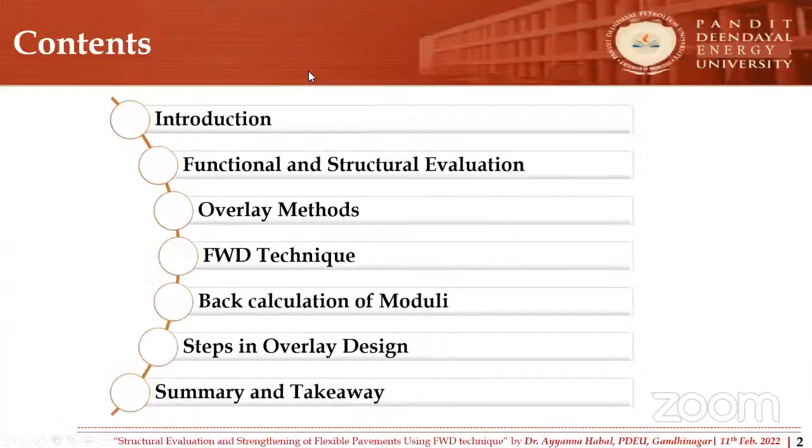I hope this is because the topic is very interesting: structural evaluation and strengthening of flexible pavements using FWD technique. This is one of the newest techniques already suggested by MORTH. Earlier we used to adopt BBD, Benkelman beam deflection, for structural evaluation, but now MORTH has mandated we have to go for FWD only. There are many drawbacks with the existing method, that is the reason MORTH has mandated FWD, and I will be covering those aspects.

Earlier speakers have discussed pavement evaluation in general, both functional and structural evaluation. I hope Dr. Ankit Gupta has already covered it, but I will be covering more in depth regarding structural evaluation, specifically using FWD technique. One is structural evaluation, and the next aspect is strengthening of the flexible pavement, that is in terms of overlay design.

Contents of today's presentation: introduction, followed by functional and structural evaluation. I will briefly touch upon functional evaluation and various methods adopted for structural evaluation, then concentrate a little on BBD and more on FWD, then overlay methods, then FWD technique in detail - what are the various parameters or equipment specifications, how to conduct this survey, and after conducting, how to analyze this data. That is very, very important.

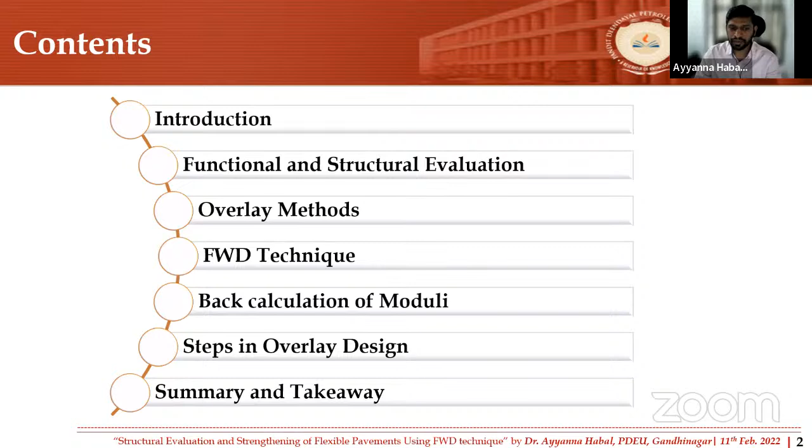Then back calculation of modulus. One important aspect in FWD technique is we have to back calculate the modulus of existing pavement layers using FWD data. For that, there is a small software available, KGPBack, and I will show screenshots and, if time permits, demonstrate it as well. At the end, I will summarize quickly the steps involved in overlay design using FWD data, then summary and takeaway from today's presentation.

Let's start. Before that, I would like to give some statistics related to roads because it is more relevant to this presentation on pavement evaluation. How many of you are aware how safe our roads are? There are so many accidents happening every day that we may not be aware of. During COVID, we might have kept a tab on checking the number of active cases, recoveries, and deaths, but no one has checked these road accidents.

If you see, these numbers are not less, they are very high. For example, for 2019, as per MORTH report, road accident deaths were over 1,51,000, and deaths occurred only due to road accidents in the year 2019 alone.

You can imagine how many deaths are happening on roads all over India. On average, there are 415 deaths per day due to road accidents. These numbers are only fatal accidents. If you include injuries, it is almost triple the number. And remember, these are only based on reported numbers. We all know that not all accidents get reported. If small accidents happen, they are usually sorted out in the field itself without reporting.

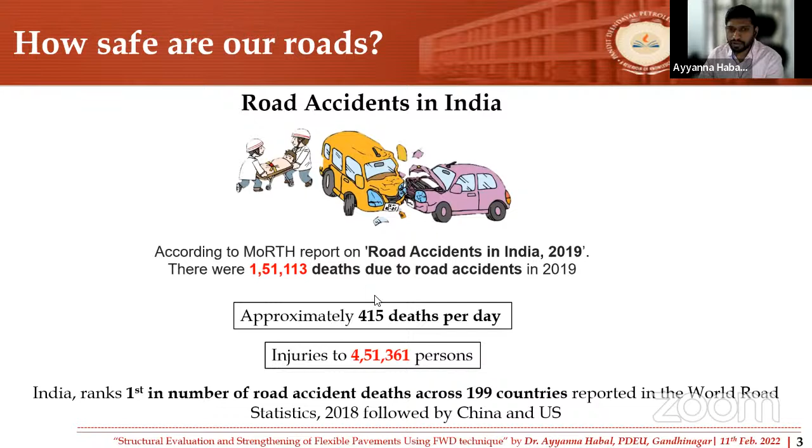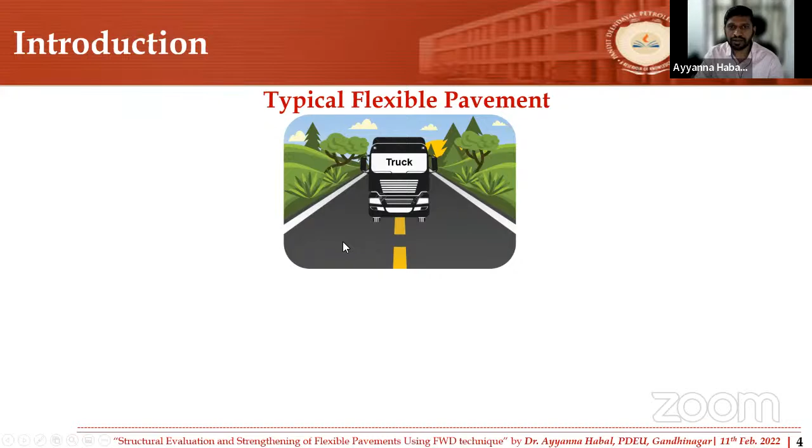Before going into the presentation, I would like to show briefly how a typical flexible pavement looks like. When we are driving on a road, it looks very nice, right? Black top with nice markings, central lane marking, side marking and all. But many of us are not aware what is underneath. There are many layers, and each individual layer has its own function. Each layer is designed and constructed scientifically. All these layers bear loads and transfer loads to the underneath layer, finally safely transferring the load.

It will create damage into the pavement, or it will start showing in terms of rutting or fatigue cracking or so many other types of cracking.

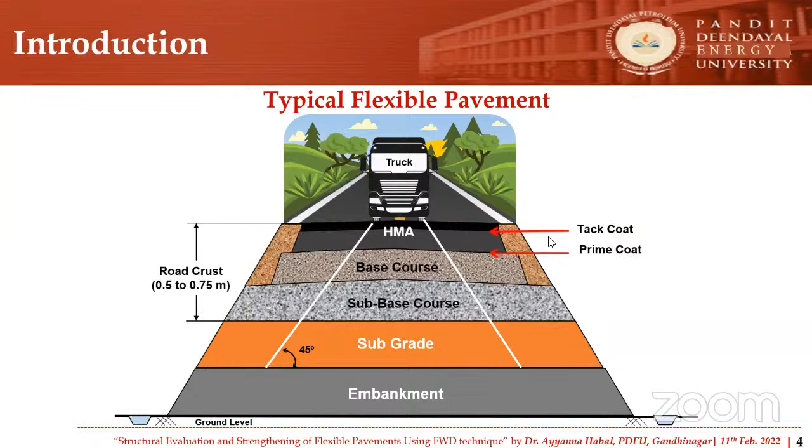So these kinds of pavements in service have to be evaluated periodically to see their functioning, either from a functional point of view or from a structural point of view. During service life, due to the repeated application of vehicular loads, because dynamic loads are plying on the roads, they will damage the road. We have to reduce that; we cannot control everything, but this deterioration should be in such a manner that it should not fail until its terminal life or design life is reached. So periodically it has to be assessed, both functional as well as structural conditions.

Functional aspects can be assessed through roughness, that is the unevenness of the road, and skid resistance can be assessed through its surface by checking whether the pavement has become smooth or not, and also drainage properties—water should not be stagnant on the road. All these aspects affect functional performance. Either it will lead to skidding of vehicles causing accidents, or if water is stagnant on the road, it will disturb visibility and lead to accidents. Because of hydroplaning also, skid resistance will drop. Because of an uneven road, riding quality will be poor, passengers will be uncomfortable, and it will increase the road user cost.

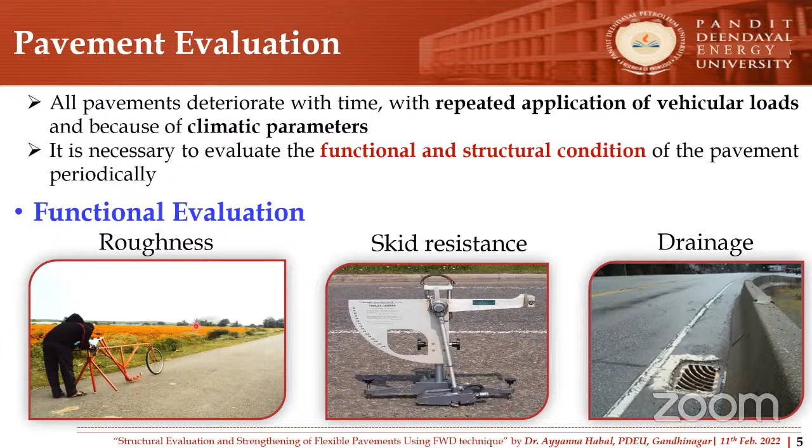Anyway, I'm not going in depth for functional evaluation. Today's presentation is restricted to structural evaluation. A structurally sound pavement should be able to withstand repeated application of wheel loads. Roads are meant for repeated application of wheel loads, right?

So even after applying many vehicular repetitions, roads should withstand the wheel loads coming over them, until their terminal life, that is, till the design life. But there are many ways it may not function properly.

It may not withstand the loads, either due to lack of support from the subgrade, or material property problems at individual layers like the asphalt layer, granular layer, or subgrade layer. There can also be variation in traffic loading. During construction there might be different loading, and in service life there might be increase in traffic loading, or adverse environmental conditions that lead to structural inadequacy of the pavement.

The thing is, one has to evaluate whether the pavement is structurally sound or not. That can be assessed in various ways.

One such method is BBD, Benkelman Beam Deflection studies. I hope many of you have heard of this, because for the last 2 to 3 decades it's been used extensively. Now slowly we have shifted to FWD, falling weight deflectometer, which I will cover in detail. This is the BBD, and this one is FWD, and DCPT, dynamic cone penetrometer—this particular test setup.

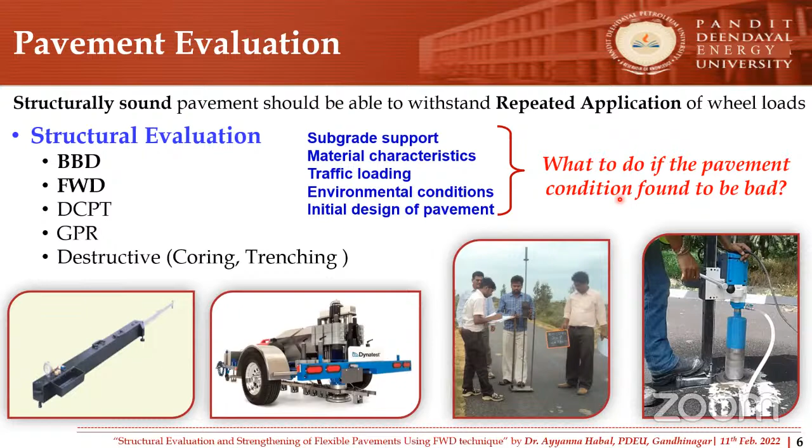Basically, if it is not sound, we have to either increase its strength through some means, or leave it until it fails completely. It may drop, we have to see the remaining life, as it may not reach the design life.

Let's see how to do strengthening. The most common practice is by providing an overlay, meaning adding an extra layer over the existing pavement. That is called overlay. Basically this will add extra life if it is a structural overlay. Otherwise, there are various reasons why we provide an overlay.

For example, to increase the load carrying capacity of the existing pavement. During design, the load carrying capacity was based on the traffic survey at that time. Later, during service life, due to diverted traffic or other factors, if the load plying on the road increases, we may have to add one more overlay to cater to that increased loading.

And then, to correct the defective surface condition and rectify surface defects and distresses, one may give an extra overlay. Also, for pavement maintenance, periodically there will be resurfacing, or overlay given, so that it can successfully reach its design life.

From the functional point of view, and sometimes aesthetic point of view also, an overlay can be provided. For example, if the pavement might be structurally adequate but has become smooth because of traffic, one may have to provide another overlay or layer just to increase the skid resistance.

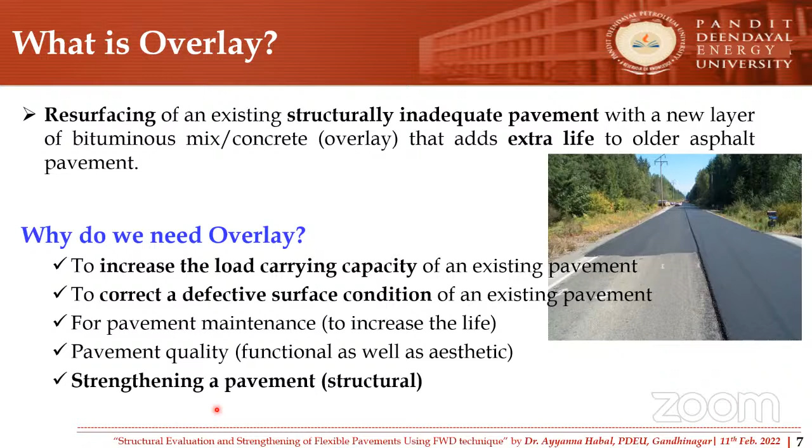And finally, for strengthening of the pavement—if it is not structurally sound, if the pavement has dropped its structural adequacy—one may have to provide an extra structural layer over the surface of the existing pavement. That way, one can strengthen the existing pavement condition.

Let's discuss the various methods available: we can provide a bituminous overlay over bituminous pavements, or even bituminous overlay on concrete pavements, and concrete overlays over bituminous pavements. Nowadays you may have heard of thin and ultra-thin white topping—these are concrete overlays over bituminous pavements and concrete pavements. That is also possible.

I'm not going to discuss all of these, as it takes a really good amount of time. I'll be discussing bituminous overlay over bituminous pavements. Now the question is how to design this overlay. As I mentioned, if our pavement is structurally inadequate, then we can go for an overlay.

We cannot simply say a pavement is structurally adequate; we have to quantify it. We need some parameters so that accordingly we can provide a suitable thickness of overlay.

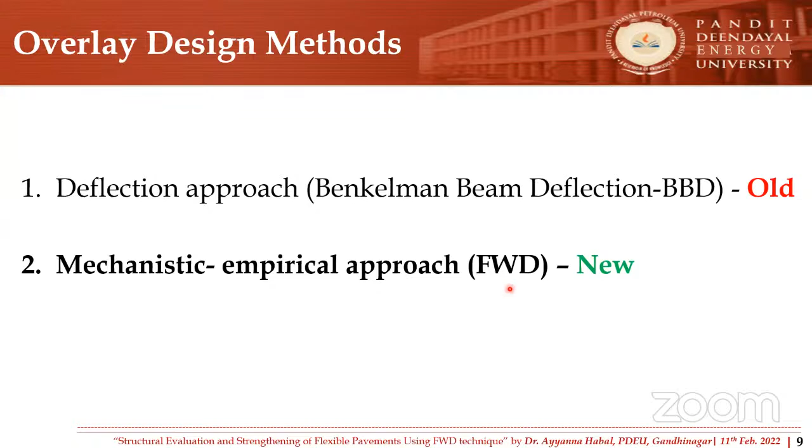There are different methods. One is the deflection approach, which is the old method—back then we used the Benkelman Beam Deflection method. The new method is the mechanistic empirical approach, in which we adopt the FWD technique. That I will be covering in this presentation.

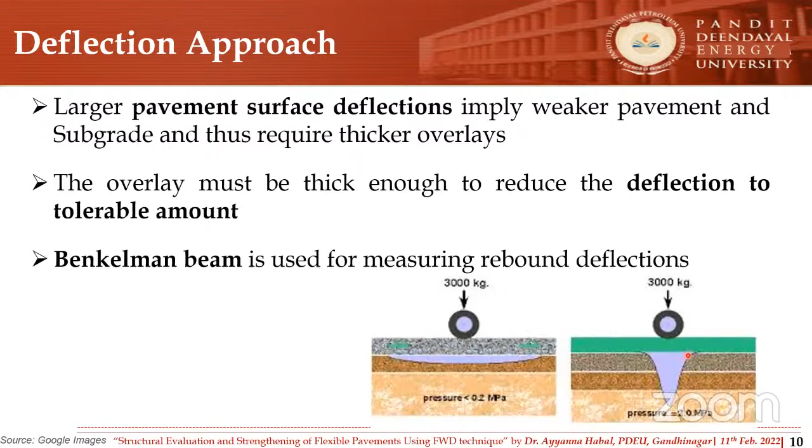So that way we get to know the structural adequacy of the pavement. If the deflection is more, that indicates the pavement is weaker, and we need to provide an overlay to bring down these deflections under the limits. This is how one can provide the overlay using this method.

In the mechanistic empirical approach, we have to calculate the remaining life of the existing pavement. Remember, initially we designed and constructed the pavement considering some years of life, maybe 15 or 20 years for a flexible pavement. Maybe after 5 years, we have to check the structural adequacy—whether the same pavement will continue to cater for the remaining life, whether it will serve or not.

That can be done by checking the fatigue cracking criteria and rutting criteria, given in IRC 37. Based on the remaining life, we can assess whether a thickness of overlay is needed or not, and if needed, how much is needed.

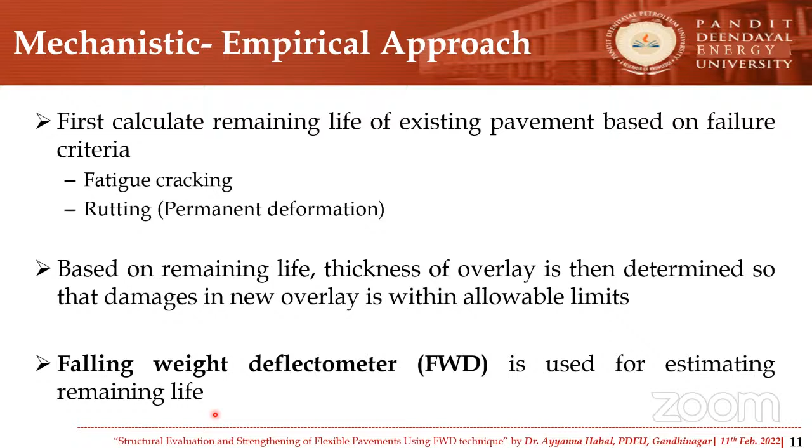Falling Weight Deflectometer can be used for estimating the remaining life—I will show you how it can be done. Well-established IRC guidelines are available for both methods: BBD as well as FWD. This is the new method, and IRC 115 is applicable for this.

Let's see why we are shifting to FWD—what is the problem with BBD? BBD was developed under the R6 research project of MORTH, two to three decades back.

It was developed and is used extensively in India. Even many developing countries still use it; in fact, even in India, we use it for less important roads. The first code, the IRC code related to BBD, was released in 1981. BBD is used for measuring the surface deflection of pavements under static or creep load.

This is a typical photograph of a BBD survey where a standard axle loading truck is used. Under this load we have to measure the deflection. The pavement will be under deflected condition, and as it slowly moves further, we measure the recovered or rebound deflection. This is either static or moving at walking speed—that is why it is called measurement of deflection under static or creep load.

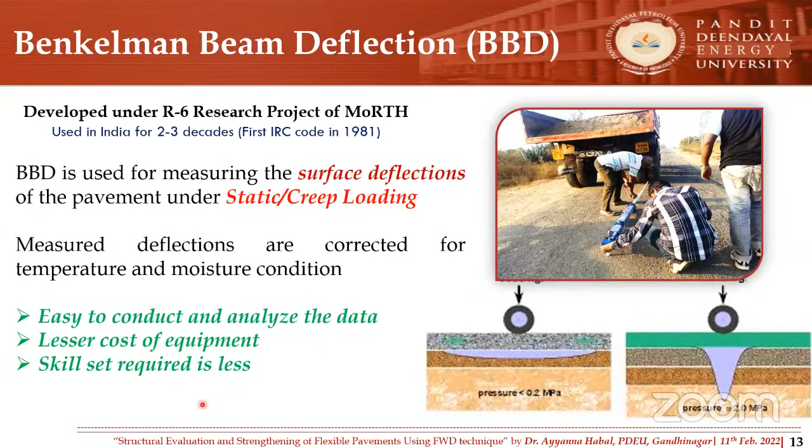But this method is quite popular and has been used for two to three decades. Even now, many developing countries use it, mainly because it is easy to conduct and analyze the data—relatively easier for conducting the survey and analysis, and at lesser cost of equipment. This equipment is very simple and its cost is low compared to FWD, and the skill set required is also less. With a laboratory assistant or a little training, we can use any manpower for conducting this BBD survey. These are the advantages, and because of that, it is extensively used.

But let's see the drawbacks of the BBD method: static load is used for measuring the deflection, and it is more labor intensive.

One of the drawbacks is that this method was developed considering thin pavement layers. Remember, this was developed 2 to 3 decades back, when we had different mixes like bituminous macadam and premix carpet, which are rarely used nowadays. The current pavement thicknesses are much thicker bituminous pavements.

So we use dense bituminous macadam and bituminous concrete. Most importantly, pavement in the field encounters dynamic and repetitive loading - moving loads - whereas we measure under static conditions, so the field simulation is not proper; it doesn't represent the actual loading condition. Another concern is repeatability of results, because of manual involvement there are high chances of error.

Properties of constituent layers cannot be predicted - remember, this is the biggest drawback. Because of that, we cannot predict the remaining life. Whatever deflection we get is a combined effect of all the layers, measured at one surface point. From that it becomes very difficult, or we cannot calculate the constituent layer properties like modulus of each layer. It is not possible.

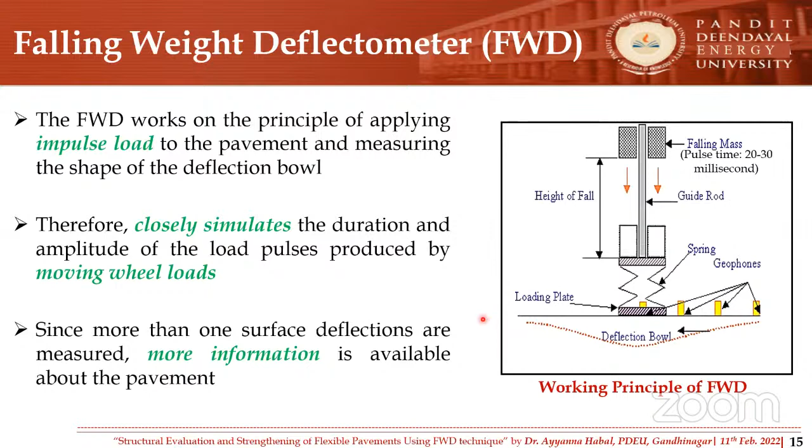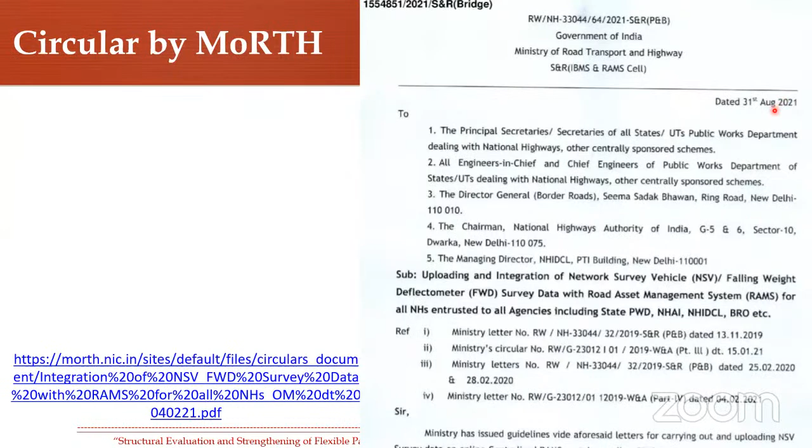There was a circular released by the Ministry of Road Transport and Highways stating that all roads have to be evaluated using NSV and falling weight deflectometer for the road asset management system. This applies to all PWDs, NHAI, NHIDCL, BRO, etc. This is a recent notification from last year. So now we are no longer using BBD - it's good to understand and learn about FWD since in future we are going to use this one only for evaluation.

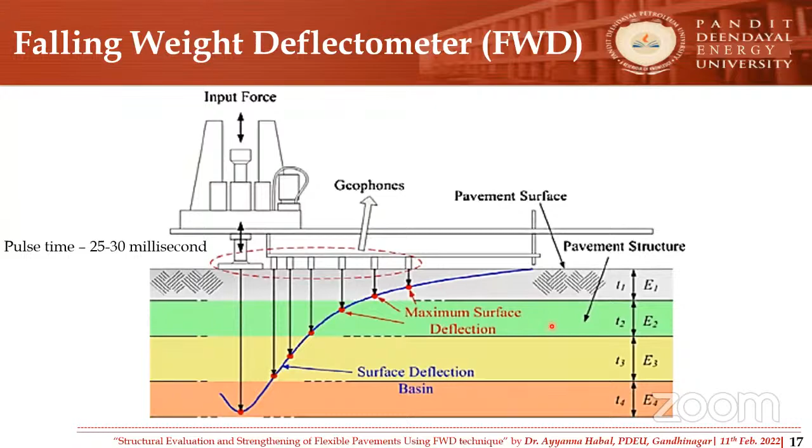I would like to cover more aspects of FWD. This is a schematic presentation - this is the trailer type FWD. This is the point of interest where we measure pavement condition. The input force: the load is lifted and dropped to produce an impulse load. A series of geophones are connected to measure deflection when the load is applied on the pavement surface. Even under the plate itself, measurement can be done - that is the maximum deflection. At different spacing, these geophones are set to measure deflection corresponding to different layers, which helps measure the modulus of different layers.

Different parameters in the falling weight deflectometer: it must produce a standard impulse load of 40 kilonewtons when it hits the road, and the loading period is 25 to 30 milliseconds. It measures the surface deflection profile, meaning the deflection bowl has to be captured.

Then we back calculate the material modulus by comparing the measured deflection bowl and estimated deflection bowl. We have to estimate a deflection bowl in such a manner that the modulus of each layer is adjusted - it's a kind of trial and error process, not simple, and tedious if done manually - almost close to impossible. That's why there are so many algorithms and software available. One such software is given by IRC along with the guidelines, to back calculate the modulus, which I will cover in subsequent slides.

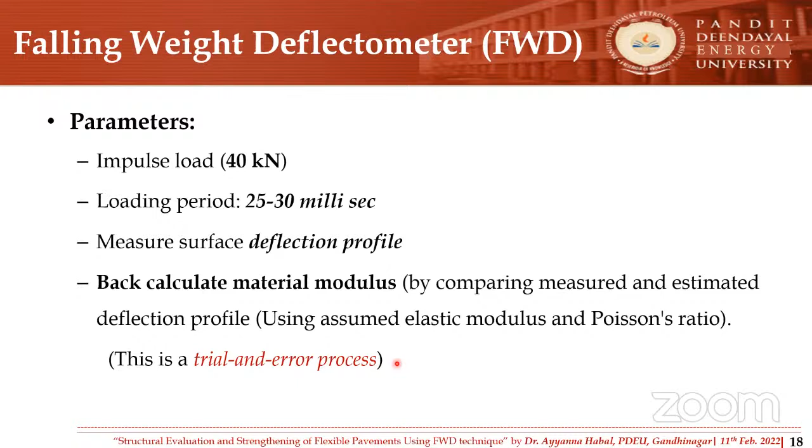I would like to show a short video of less than 2 minutes to see how this equipment looks like. This is a trailer type FWD. It is an animated video. Later on, I will show actual photos of FWD.

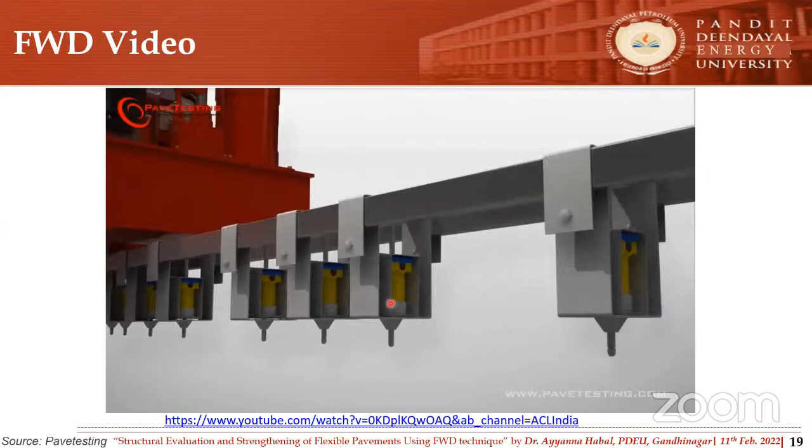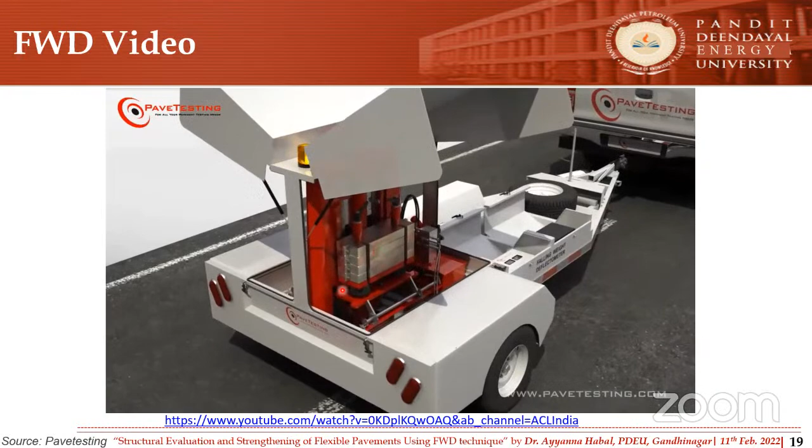This yellow color you can see, these are the geophones which will acquire the deflection data when load is dropped on the pavement surface. Because of this trailer type or vehicle mounted deflection FWD, labors can be reduced. You can see here loading arrangement. This load can be lifted and dropped to produce an impulse load.

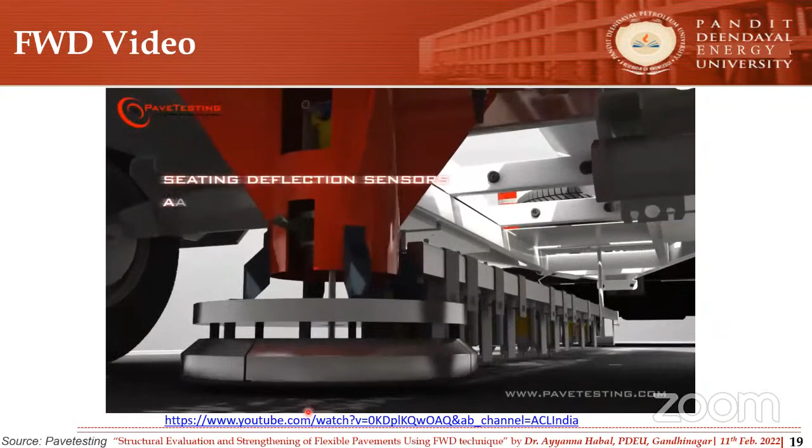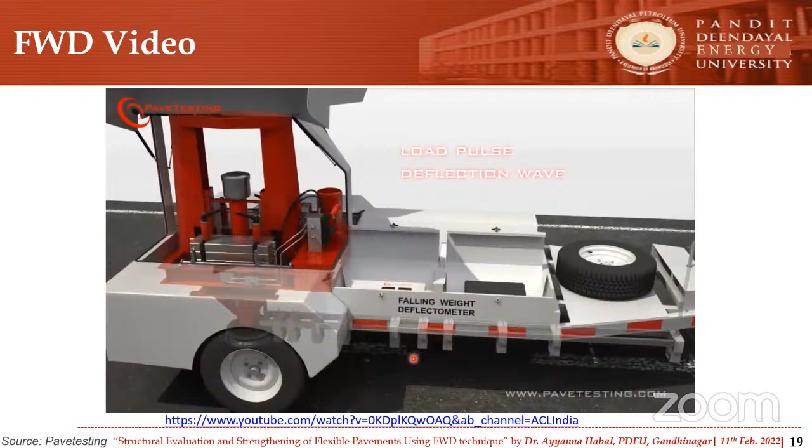You can see while measuring, this plate has to be in contact with the pavement surface. When load is dropped, at that instant of time, all the geophones record the deflection data, and also peak load will be recorded. These geophones are set in a series at different intervals. Around 4 to 9 geophones can be used depending upon our requirements based on the pavement thickness.

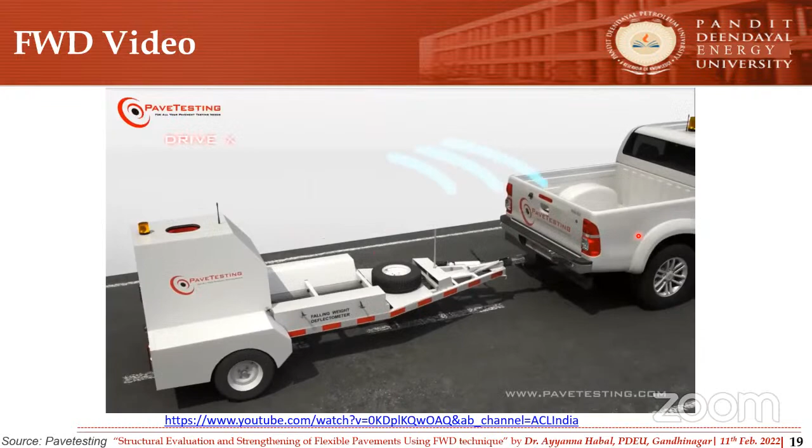It is a quick method. Just at each location, it has to drop 4 times and all the data has to be acquired, and it can be further moved to the next location. It is vehicle towed or vehicle mounted, so easily the majority of the work can be covered within less time. Then next comes the parameters.

As I said, 4 to 9 sensors can be used, or even 6 to 9 depending upon the requirements and type of the FWD. Sensors or geophones are placed exactly under the load drop weight, that is 0 distance, then at 200 millimeter distance from the loading point, 300, 600, likewise up to 1500 or sometimes even 1800 millimeters can also be used.

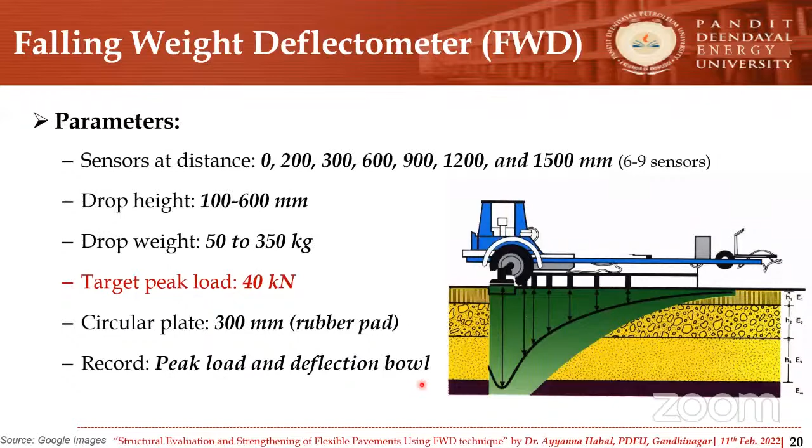A circular plate of 300 millimeter diameter is used with rubber padding so that firm contact will be there with the road surface in the loading plate. And there has to be an arrangement which can record the peak load and deflection bowl at the same time. This is very useful. With this data only, one can further calculate the modulus of each layer.

Now we know about the instrument. Let's understand, before going into FWD survey, there has to be a set of exercises one has to do. All the relevant data of that particular interested stretch has to be collected - it can be initial design data, later on whatever changes in construction, any maintenance, or earlier overlay history - everything has to be collected.

Then pavement condition survey has to be conducted from the rutting and cracking point of view, basically to identify the uniform sections. For each lane, for 50-meter length, meaning 3.5 meter by 50-meter blocks, has to be considered, and each block we have to check for rutting and fatigue cracking. We have to identify the uniform section in terms of good, fair, and poor as per IRC guidelines.

For example, we can say it's a good block if it has isolated cracks less than 3 millimeters which are less than 5% of the area, and also rutting is less than 10 millimeters. In that case, we call it a good section.

Likewise, if wide, interconnected cracks of width 3.0 millimeters having more than 5% up to 20% cracking is considered as poor. Also, either or, if the rutting is more than 20 millimeters, then that particular section is considered poor. Remember, this is important - this is linked with the further survey. That is the reason everyone has to do this before going to field with the FWD equipment.

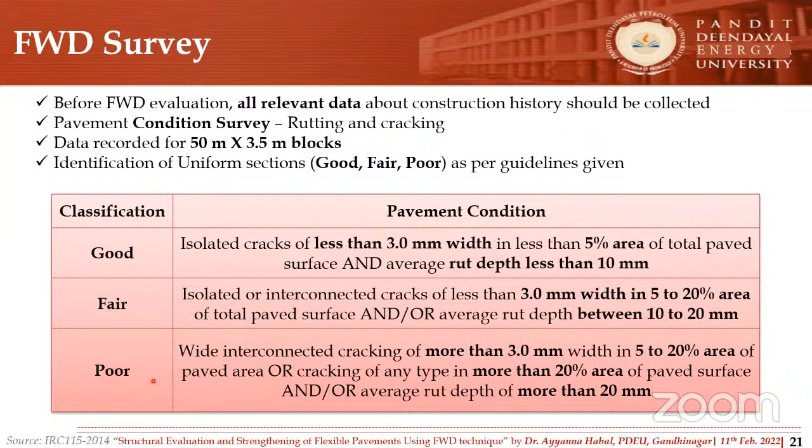Once we have this information, we should know how many data points have to be collected, because based on this pavement condition, we have to take the data points. For example, if we consider single lane two-way, we have to conduct it every 60 meters if the pavement condition is poor. If pavement is good, only 1 point at 500 meters is enough.

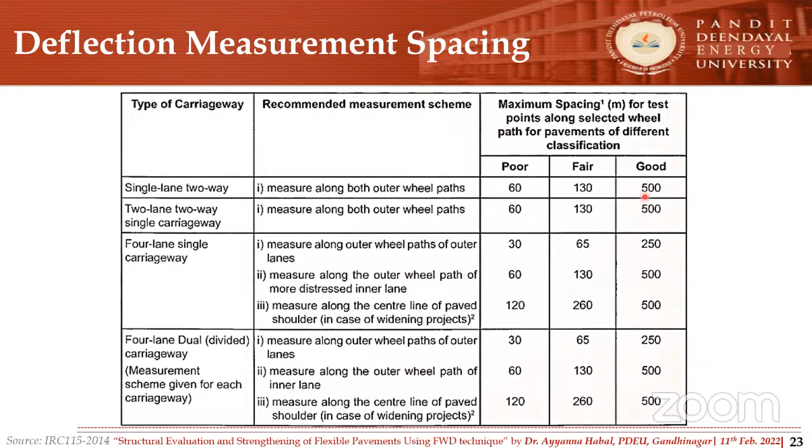You can see it is almost 8 to 10 times difference. So basically, if our pavement section is poor, we need more data points to represent that particular pavement section.

After knowing this, we have to go to the field with the FWD setup, and at each location, a seating load is dropped first. Remember, seating load is just to make firm contact of the plate with the road surface. That data will not be used for analysis. The next 3 drops have to be dropped, and that data has to be taken for further analysis.

Average peak load and peak deflection for 3 drops has to be collected, and also record the pavement temperature at 40 millimeter depth every 30 minutes. This is also needed for the correction. That is the reason every half an hour we have to take the pavement temperature. Also, there is a criteria: if the pavement temperature exceeds 45 degrees, then FWD test should not be conducted. Why it is so, I will cover while discussing the corrections.

In addition to this, we have to collect the existing pavement thickness, which is very important. For further analysis, we are going to use existing layer thickness. For that, either one can take a test pit section at every half kilometer, or we can use GPR or any alternate method where we can get the actual thickness of each layer.

Then comes analysis of FWD data. After collecting all the data from the field, we have to perform these steps as a data analysis process. First, we have to process the load and deflection raw data. Remember, when we get data, we cannot simply use all the data for analysis. That I will cover in what has to be done further.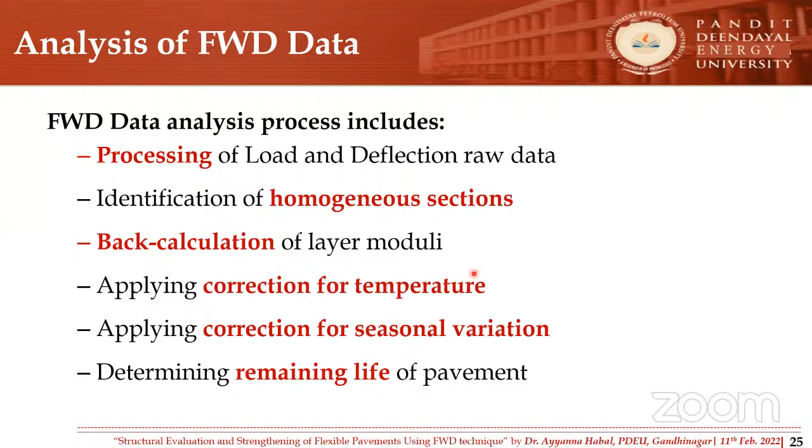And identification of homogeneous sections. Then comes back calculation of layer moduli using KGPBack software, and then applying the correction for the temperature. This is for the bituminous layer, and then applying the seasonal correction for the granular layer and subgrade layers. Based on these moduli and existing layer thickness, one can determine the remaining life of the pavement. Now let's see these steps in detail.

First, after measuring the deflections, we have to see whether it is making sense or not. Result should decrease with distance, meaning deflection should be more under the load, wherever the load is dropping, and the deflection should decrease with increase in the spacing of these geophones. Also, deflection should not exceed the capacity of the sensor. If the capacity of the sensor is exceeded, that indicates it is crossing its limits, meaning possibly the actual deflection is more. So we may have to go for higher capacity sensors.

Then normalize the deflections for 40 kilonewton. We need a standard 40 kilonewton loading, but in reality, when we conduct the test, we adjust height and weight, but the target peak load will be slightly higher or lower. So we have to correct it for that. For example, we can use linear correction: if the measured deflection is 0.8 millimeter at a recorded peak load of 45 kilonewton instead of target 40 kilonewton, then we calculate 40 by 45 into 0.8. This way we can correct or normalize the deflection data. Remember, only after normalizing do we use the data for further analysis.

Then we have to identify the homogeneous sections based on deflection, or subgrade strength, or surface curvature index. Any of these parameters can be used with the cumulative difference approach. I'm not covering more about it; one can refer to section 6.2 of IRC 115 for this.

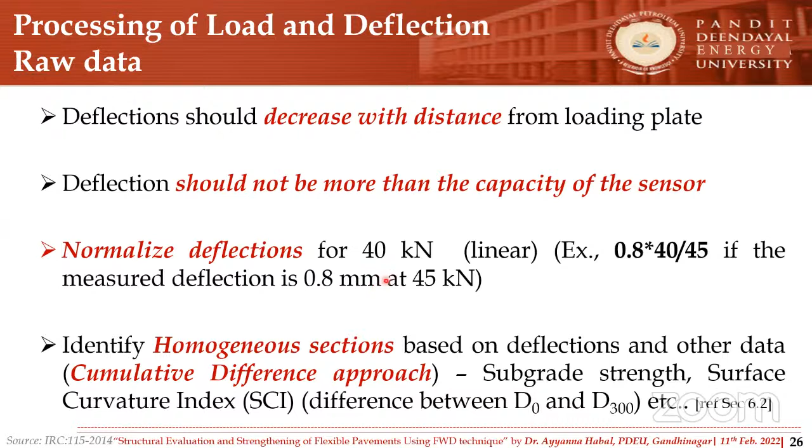Then back calculation of layer moduli. Measured deflections have to be normalized, as I discussed. That data has to be used in the KGPBack software, along with the radial distances at which deflections are measured, meaning the spacing of geophones has to be mentioned. Then actual layer thickness, which is measured from the field at every half kilometer. Then Poisson's ratio value of different layers. Approximate or tentative values, standard values given in the standards, can be used for back calculation of moduli.

Applied peak load and loading plate radius are used to back calculate the elastic modulus of different layers of the existing pavement using an appropriate back calculation technique. I'm mentioning KGPBack, but it's not hard and fast that you have to use that. There are many other softwares available for the same purpose; one can use those as well.

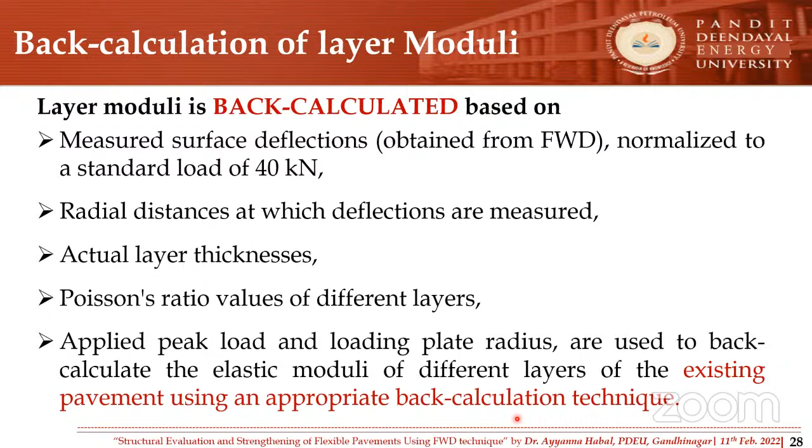Now let's see for back calculation, another important aspect is initially we have to assume some range or some set of values, also called seed values. Remember, while calculating this, we have to match the measured deflection bowl with the calculated one. For doing so, initially we have to assume these values, and for that, suitable moduli ranges have to be assigned.

For subgrade, it can be 20 to 100 megapascal, or 5 to 20 times of CBR, which can be measured from DCP, in situ CBR. Alternatively, it can be measured using equations based on the 1200, 1500, 1800 spacing deflections corresponding to these geophones. That can be used to calculate the tentative moduli for subgrade, which will be considered more accurate compared to this.

Granular layer: 100 to 500 megapascal. And for bituminous layer, for thick layers without much cracking, if the condition is good, one can consider 750 to 3000 megapascal. If the bituminous layer is badly cracked, if the condition is fair to poor, one can consider 400 to 1500 megapascal—almost half of it.

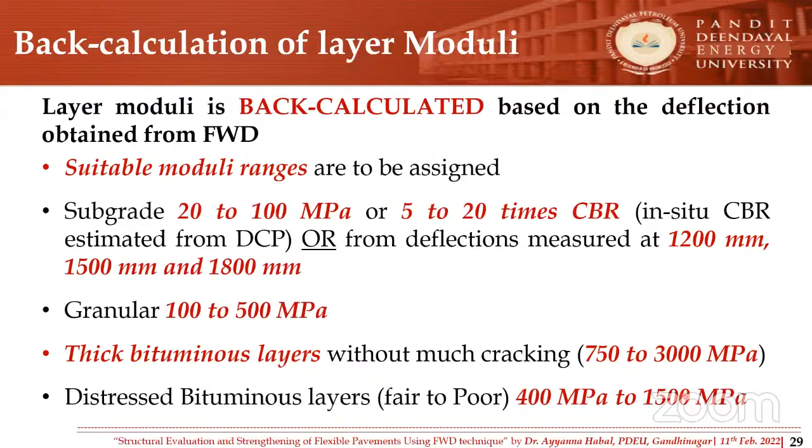Then comes correction. After calculating the modulus back calculated from the software, we have to apply correction. Temperature correction is applied only for the bituminous layer because its stiffness depends on temperature. Standard temperature considered is 35 degrees. If the pavement temperature is 35, no need for correction—or if you apply it, the factor will come out as 1, which is as good as no correction.

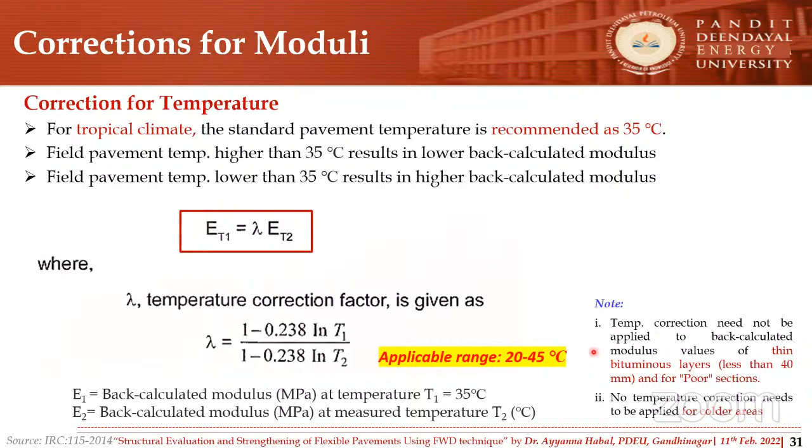There are some more criteria. Temperature correction need not be applied to the back calculated modulus of a thin bituminous layer—if the existing bituminous layer is 40 millimeter or less, no need to apply temperature correction. Also, if the pavement is in poor condition, badly cracked or distressed, temperature correction is not applicable. And temperature correction is also not needed for colder areas. Remember these points whenever you are analyzing FWD data.

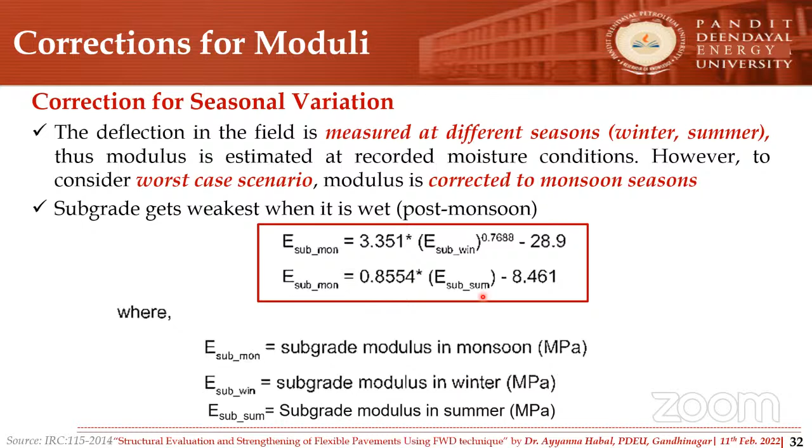Then comes seasonal correction. Usually, pavement undergoes more deflection when in saturated condition. This happens immediately after monsoon, post-monsoon, or during monsoon. So whenever we conduct the FWD survey, if conducted in monsoon, no need to apply correction. Other than monsoon, if conducted in winter or summer, we have to apply correction as per this equation—the first equation is applicable for subgrade correction when measured in winter, and the second equation when deflection studies are measured in summer.

Similarly, for the granular layer, the same approach applies, only the equations are different.

Then, after applying correction, we get so many deflection modulus values. Now, which modulus has to be considered for calculation of remaining life? For a given homogeneous section, number of modulus values for each layer are back calculated, and for each layer, select the 15th percentile elastic modulus. This means only 15% of values will be less than this value; the remaining 85% of cases will be higher, so it will be on the safer side.

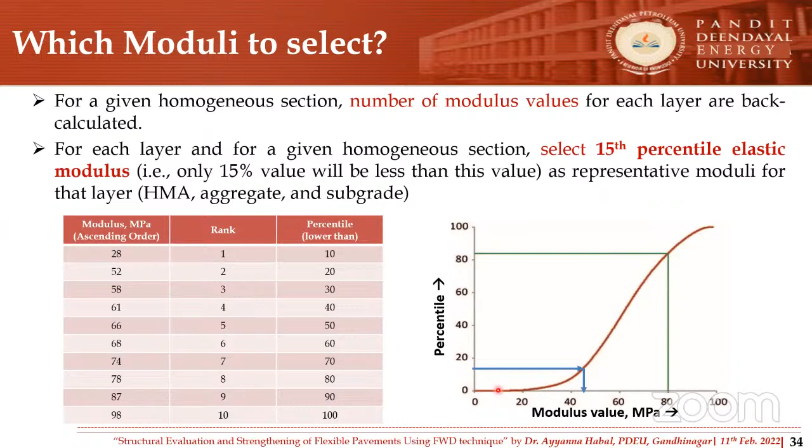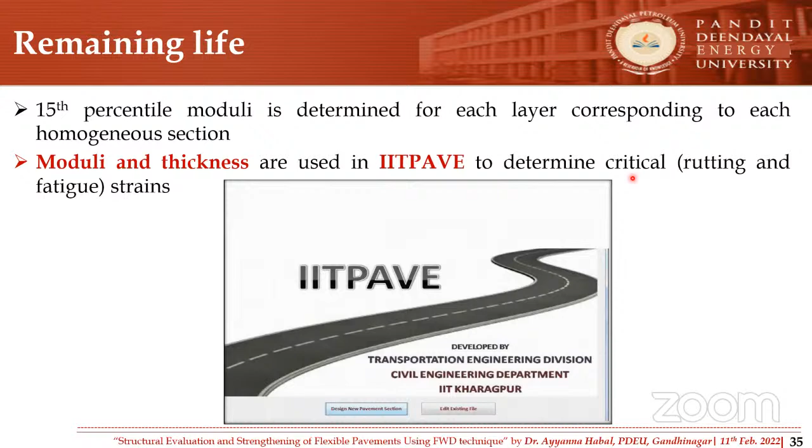Then comes remaining life. Remaining life has to be calculated using IIT Pave. I hope by now all of you are aware of IIT Pave software, which is used for flexible pavement design as per IRC method. These 15th percentile moduli values which we determined have to be used in IIT Pave to determine the actual critical strains or actual strains at critical locations. These strains will help us to determine the remaining life using these models.

Rutting and fatigue models which are given in IRC 37 2018. Basically, we have to enter the strains and calculate the fatigue and rutting life remaining against fatigue failure and rutting failure. Remember, we will be getting two different values - maybe we may get 5 million standard axles from the fatigue point of view, and maybe 8 or 10 million standard axles from the rutting point of view.

Remember, out of these two, we have to select the shortest one. If 5 is the minimum number, we have to take 5, and we have to consider 5 million standard axles as the remaining life. If the remaining life is greater than or equal to the leftover design life, then no need of overlay if there is no change in traffic. If any change in traffic is there, or remaining life is less than leftover design life, then one may have to go for an overlay.

Let's see how that can also be done. So this is for each homogeneous section. We got a 15th percentile modulus, as I mentioned in the earlier slides, and also the corresponding layer thickness, bituminous thickness and granular layer thickness - these are actual thicknesses from the field. Then these are the critical strains, tensile strain and rutting strain, which we got from the IIT PAVE software.

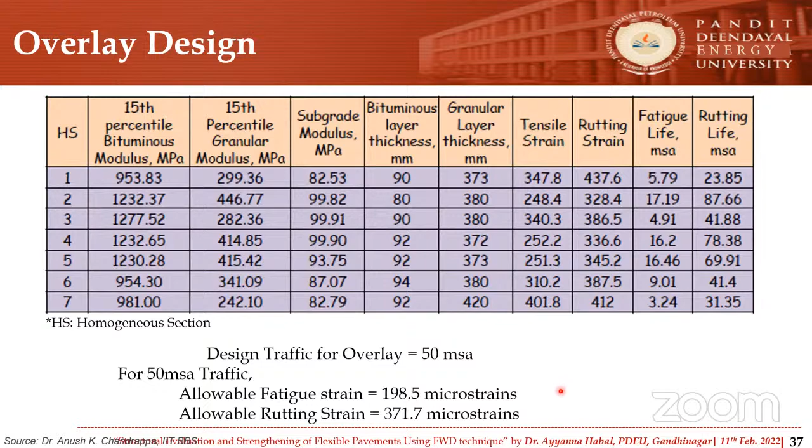After this, we have to perform the strain analysis in IIT PAVE considering a new layer, one additional layer in the bituminous overlay. Pavement is modeled as a 4-layer system; for conventional pavement design, we model it as a 3-layer system. In this 4-layer system, the top layer will be the new bituminous layer with new properties - either you can take actual resilient modulus or values from the indicative table given in IRC 37. But pay attention, the second layer is another bituminous layer, the existing bituminous layer, and this modulus is from the FWD data, back-calculated modulus.

The thickness is whatever is available in the field. Similarly, the granular layer has a back-calculated modulus and existing thickness, and modulus of the subgrade. From this we have to analyze and check the critical strains. If they are within the allowable range, we can say the assumed thickness is satisfying, and we can go ahead with that overlay. If not, we have to change this value and may change VG30, VG40, whichever is needed, and accordingly perform this analysis once again.

Okay, in this case, with this combination, we are getting strains that are within the allowable strains. So we can say a 90 millimeter thick overlay can be provided for it.

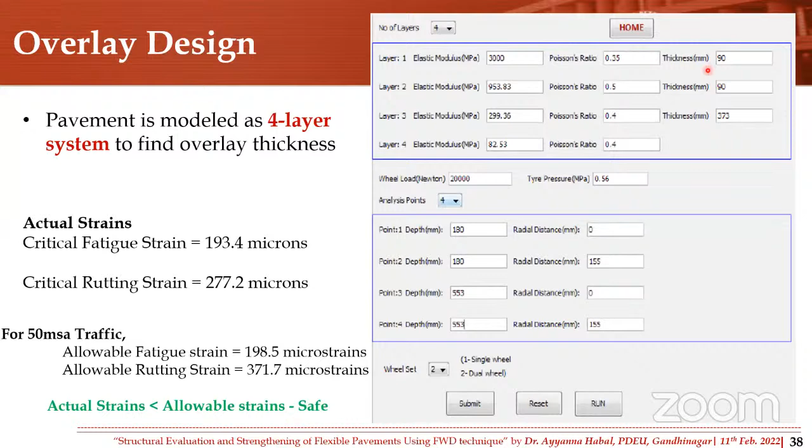Now let's see the stepwise design methodology, so that quickly I will go through it and we will have some time for discussion.

First we have to measure the surface deflection of an in-service pavement using FWD, meaning the already existing pavement. We have to conduct the FWD survey, and after that normalize the deflection data to 40 kilonewton standard peak loading.

Then we have to collect the information related to layer type and thickness by performing test pits or any alternate method at every half kilometer interval.

Then we have to back calculate each layer's moduli using KGP back software. Remember, giving seed values and selecting sensibly the lower and upper limit of the moduli is very, very important.

After back calculation, we have to apply temperature correction for the bituminous layer and seasonal correction for the granular layer and subgrade layer, corresponding to post-monsoon condition.

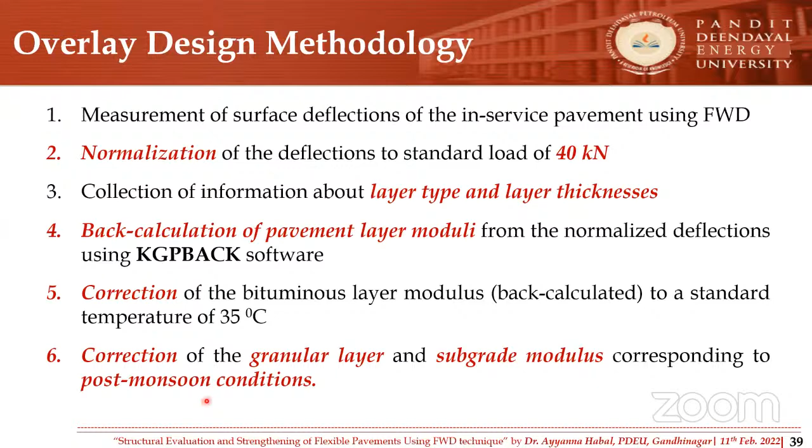Then we have to analyze the in-service pavement using layered elastic theory in IIT PAVE, with the back calculated moduli and existing layer thickness collected from the field.

And we have to check the critical strains, that is horizontal tensile strain at the bottom of the bituminous layer and vertical compressive strain on top of the subgrade.

Using these strains, one can estimate the remaining life using the fatigue and rutting performance models given in IRC 37 2018.

And then usually it is recommended for the design of overlays to take 10 years. However, for less important roads, one may go for up to 5 years. This is in general.

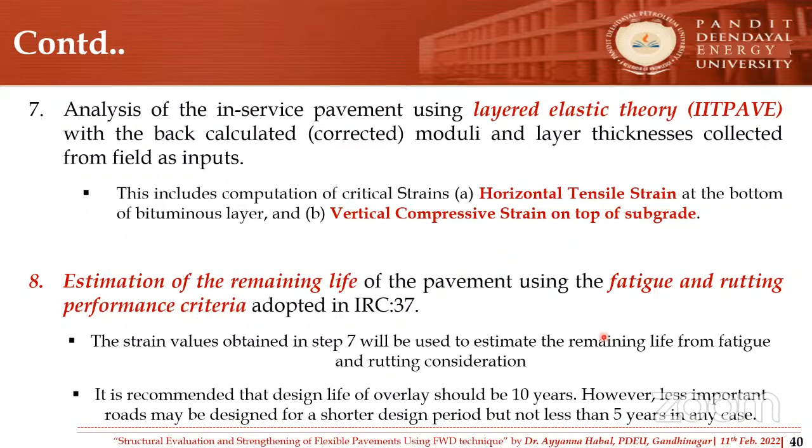But here one has to pay attention to where to check the strains. For overlay, after checking the remaining life, we assume a trial thickness, and then check the critical strains, whether within allowable limits or not.

When checking here, we have to note the critical strains at the bottom of the old bituminous layer and top of subgrade. I think top of subgrade is clear for all.

But in the bottom of the bituminous layer, there are two bituminous layers. There are high chances of confusion about whether to take below the new bituminous layer or below the old bituminous layer. That is the reason you have to pay attention and always check the critical strains at the bottom of the old bituminous layer.

And compressive strains can be checked on top of the subgrade. Whenever these strains are within allowable limits, this can be considered safe. A typical design example is presented in Appendix 4 of IRC 115. I will show it.

Now for the KGP back software demo. There is a software called KGP back which will be accompanied with this guideline. Whenever you purchase IRC 115 2014, you will get a CD with this software that can be used. It's simple software. I would like to show a data sheet.

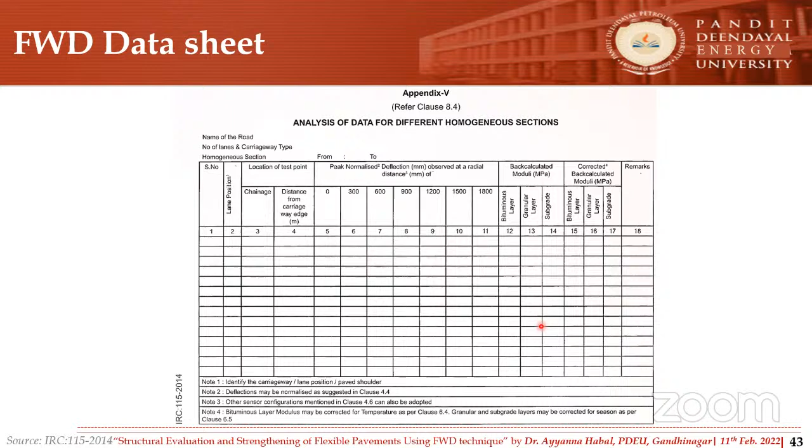At each point we have to have this deflection data, and also temperature at every half an hour. These have to be collected for further data analysis. Once we have that data, easily we can perform that.

Before going to the demo, I would like to summarize. In this presentation, we have seen both functional and structural evaluation basics, and overlay methods by BBD, the old deflection method, and its drawbacks, and why we have shifted to the new technique, the mechanistic empirical method using FWD.

Then back calculation of layer moduli for each layer, and correction of moduli both for temperature and seasonal effects. Remember, temperature correction is applicable only for the bituminous layer, whereas seasonal correction is applied for the granular layer and subgrade layer. Then we discussed the overlay design methodology as per IRC 115, and now I will show the KGP back software demo.

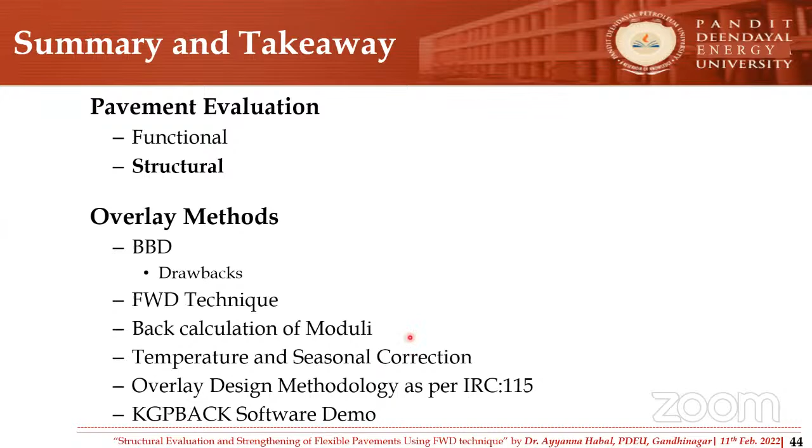Before that, I would like to show the photographs of an actual FWD. This is one of the FWD from Maharashtra, Nasik, from one of the consultants they had.

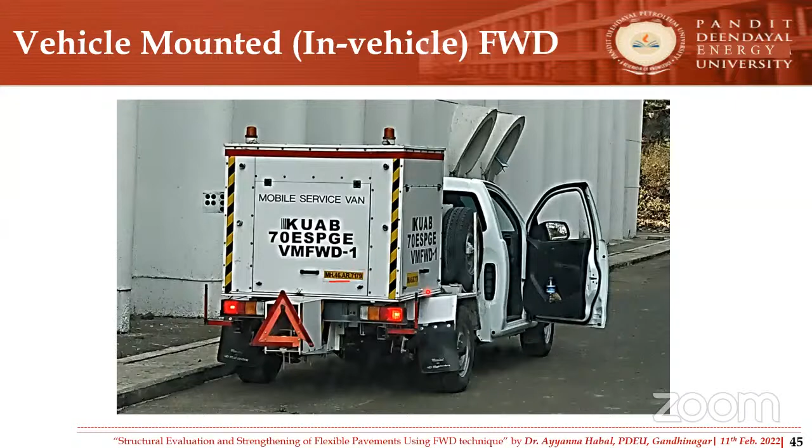You can see this is not trailer type. This is a VMFWD, vehicle mounted falling weight deflectometer. This complete setup is having the FWD. This is how it looks.

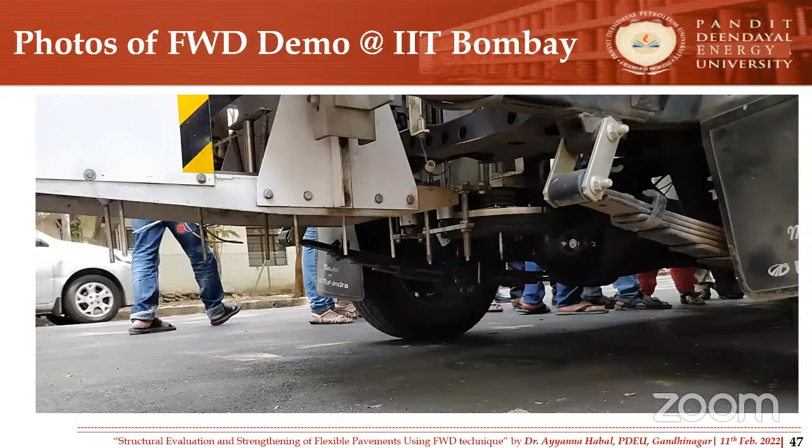You can see this is the loading plate, which is accompanied by a rubber pad, and there is a geophone exactly at the middle of the plate as well. And there are different geophones at different spacings. You can see a series of geophones are there. This is from another view.

This is how the FWD will be positioned while measuring. First, initially, this complete arrangement will be lowered and it will be in touch with the pavement. At this time, the first load will be dropped. That is considered as the seating load, and remember that data has to be discarded. And the next 3 drops will be performed and the deflection data has to be considered.

If you see here, this is the loading plate. Here one geophone is there. Likewise, here at series, geophones will be there. They will be recording the deflection data. And this was the team at IIT Bombay when we had the demonstration of this FWD.

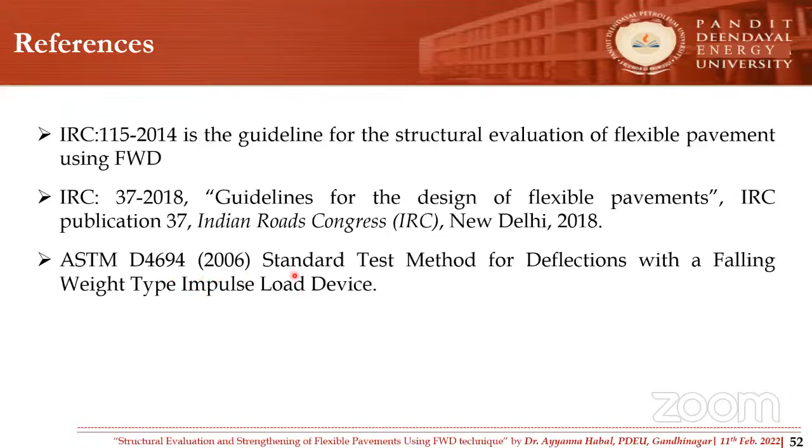Organizers and participants, if you would like to know more or read more, you may refer IRC 115. These are parallel. Whenever you are performing overlay design, you have to refer this, and IRC 37 also. And ASTM D4694 is for FWD. If somebody would like to refer, they may refer this as well. And if you have any questions, you can ask meanwhile. And if the organizer says if time is there, I will demonstrate the software with you.

Yes, sir. Professor Vivek, are you there? Yeah, definitely. We have some questions in the chat box. Maybe, okay, let me check. Let me answer. Yeah, you can.

What is the accuracy level of BBD and FWD? This is a question by Raghavendra N. This is quite difficult to answer straightforward, but it has been stated that the error involved in BBD will be more. If you see the way we measure, it is a manual method. Many times we have to check the sensitivity of the dial gauge, whether it is properly working or not. So definitely the accuracy involved in BBD will be relatively lesser compared to FWD. And in FWD, we use geophones, which are sophisticated compared to dial gauges for measuring the deflection data. So I cannot say with a number how much, but definitely FWD data is more reliable compared to BBD data, and more accurate as well.

We have one more question from Mr. Ashok Kumar. Is it possible to estimate remaining life identification of sections for reconstruction, pre-overlay, repair and overlay design with FWD data? Definitely, with this particular data, whatever I presented, we can estimate the remaining life. The only requirement is the deflection bowl we need. In addition, we need individual layer thickness, the existing pavement layer thickness. If we know that, and with the assumption of sensible modulus values, upper and lower limit, we can easily calculate the back calculated modulus. Once we have these values, we can easily calculate the remaining life. That is possible.

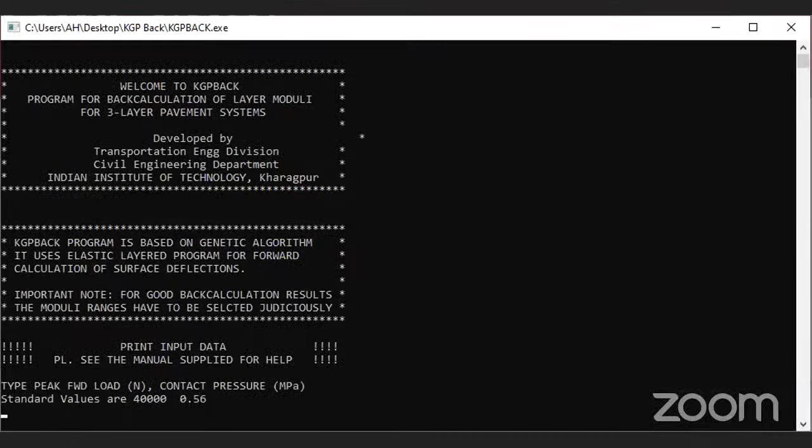I think, can organizers guide me? It is taking one window, how can I share the entire screen? I would like to share my complete desktop. Is it possible? You have to open the software and share that screen. Only that screen option is not the case. I can do that, but I wanted to show side by side input values from the code. Okay, if that is not possible, that is fine.

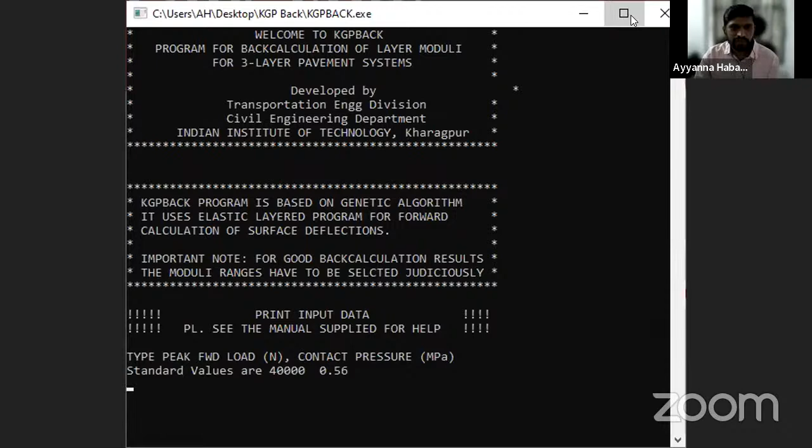I hope all of you can see my black screen, right? This is the software, yes, a small software, KGPBACK. Okay sir, if there are no questions, I will go ahead with this.

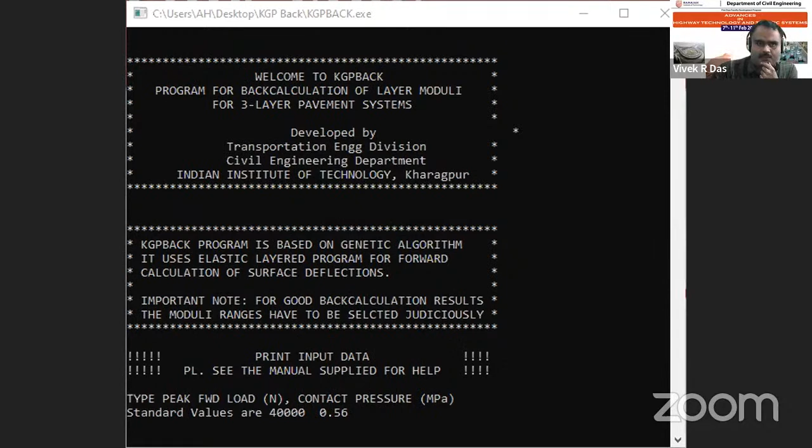And if any of you are referring to IRC 115, I would like to take the example given in the appendix at the end. Hello sir, some questions are there in your chat box. Okay sir, let me see that. Excuse me.

Most of the time road is upgraded as per the increased traffic instead of FWD analysis. Remember, even for increased traffic, we have to do an FWD analysis to know the existing condition. As I said, remaining life might be 5 years. That 5 years, if you calculate traffic as of the initial design period, it might be different. But if you analyze the traffic for the next 5 years based on the current scenario, it might be different. Typically overlay is designed for 10 years, so we have to see the traffic for the next 10 years considering the present scenario. For designing, we need to know the existing condition, that is possible through FWD.

Sir, is there any answer? I think one of the participants is answering: recommended values of Poisson's ratio are 0.5, 0.4, and 0.4. It's correct.

What is the impact? I'm not getting this question. Maybe, what is the impact load over? It is an impulse load, it is an impact load and it is a dropping weight. But if you see the contact of the load, it is in milliseconds. It is closely similar to the moving wheel loads, so it is more appropriate compared to static or creep loads. Under that load, measuring deflection is very challenging, but with the help of instrumentation and geophones, it is possible to measure that deflection under the load pulses, exactly corresponding to the peak loads. Basically, they will be measuring continuously, but data will be refined to get the deflection corresponding to the peak loads. That will be used for analysis purposes.

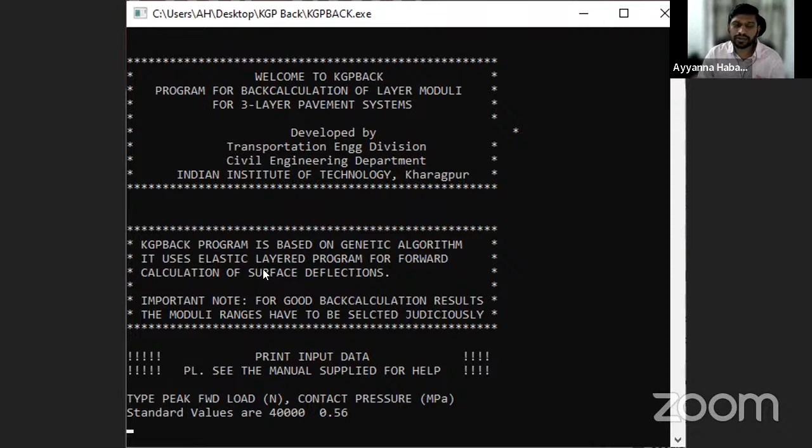Demonstration, okay. If you see this, when we open this software, it says welcome back, welcome to KGP back program. This is developed by IIT Kharagpur, and this particular software is based on genetic algorithm. Let me demonstrate here.

There is an important note for good back calculation results: the moduli ranges have to be selected judiciously, that will come at a later stage. First it says type peak load in Newton and contact pressure. Standard values are also given, you can take directly 40,000 Newton or 40 kilonewton. Remember we used this.

Here we have to enter values with the spacing. 40,000 first is a standard load, followed by a space, which I am using 0.56 as contact pressure.

Then how many deflections were measured? I am going with Appendix 4 of IRC 115. Here I can see 7 geophones are used.

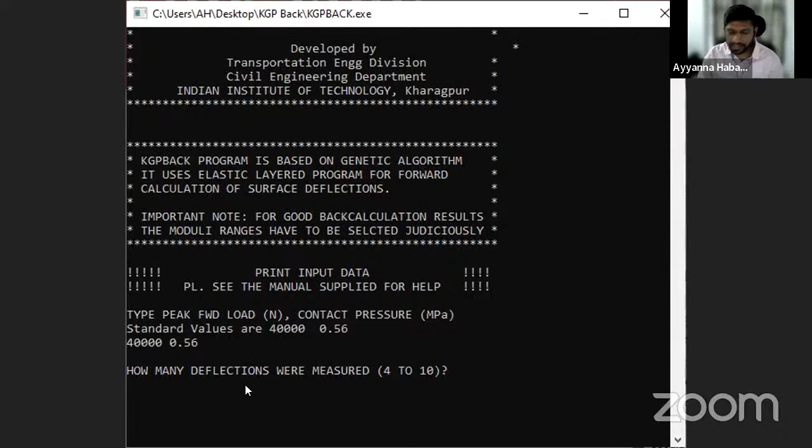After that number, it will ask what are the spacings. Definitely the first geophone will be under the wheel load, exactly under the drop weight. Next is at a spacing of 300. Remember, here we have to give this number with space 0, space 300, space 600, and so on.

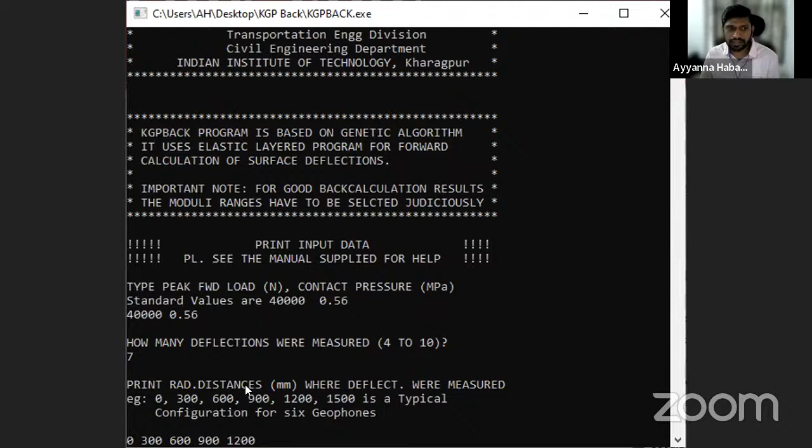900, 1200, 1500, and 1800. Then print measured deflection in millimeters.

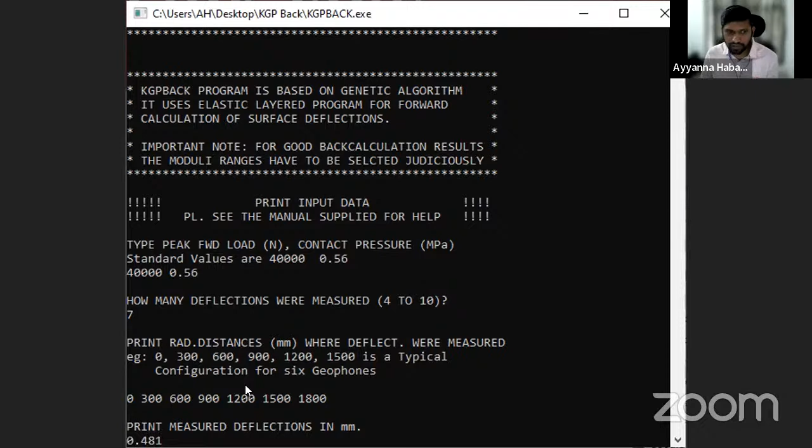Now we have to enter deflection values corresponding to each geophone. Remember the order should be same. I'm entering 0.481, that is the deflection corresponding to 0 distance, meaning exactly under the drop weight.

Next deflection, you can see these values are decreasing, right? Because as the distance from the drop weight increases, deflection will decrease. That makes sense, and this we have to check initially while screening the data. If anything is not logical, that set has to be eliminated or not considered for further calculation. After entering this data, it is asking to give the pavement related inputs, a 3-layer system ranging from the top.

Basically, first we have to enter the thickness of the top layer. As per this code, it is 170. Remember, this is the thickness of the top layer, meaning the bituminous layer. There might be BC, DBM, 2-3 layers, so we have to enter the combined thickness of the bituminous layer.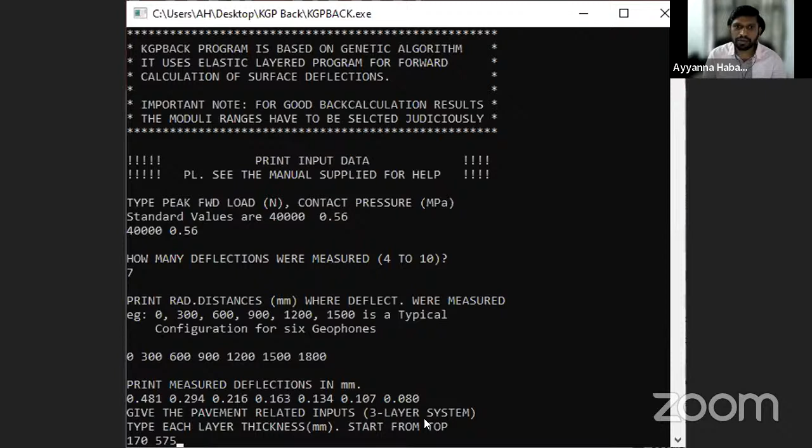Then the thickness of the granular layer, that is WMM plus GSB. Also please note, no need to enter thickness of the subgrade, it will be considered semi-infinite. Even in new pavement design also, we will not enter the thickness.

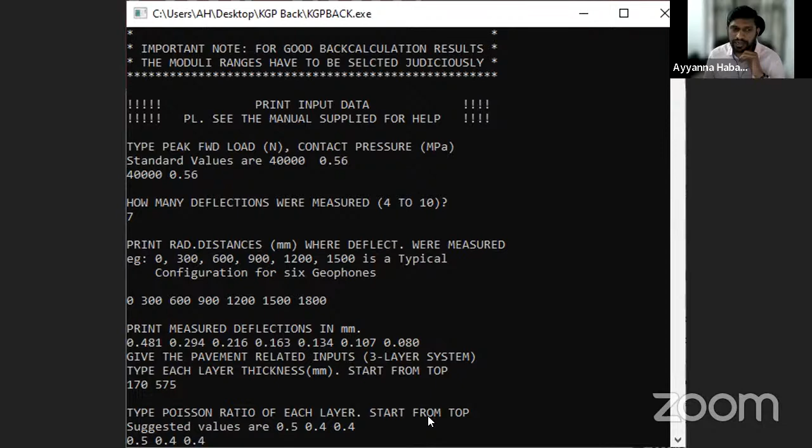I have entered. Now it is asking to type Poisson's ratio of each layer starting from the top. Suggested values are given, I'm taking the same values, but here we have to enter for all 3 layers: bituminous layer, granular layer, and subgrade as well. Do not miss the subgrade, only thickness is not needed.

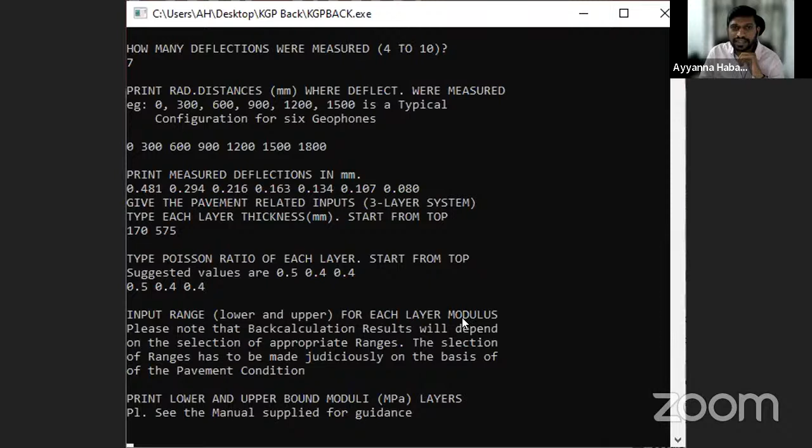Once entered, it is asking for input range, lower and upper, for each layer modulus. These are the seed values we have to consider, and again it has to start from the top. I'm taking the top layer, bituminous layer, as a good condition, 750 to 3000, and enter. This is for the first layer.

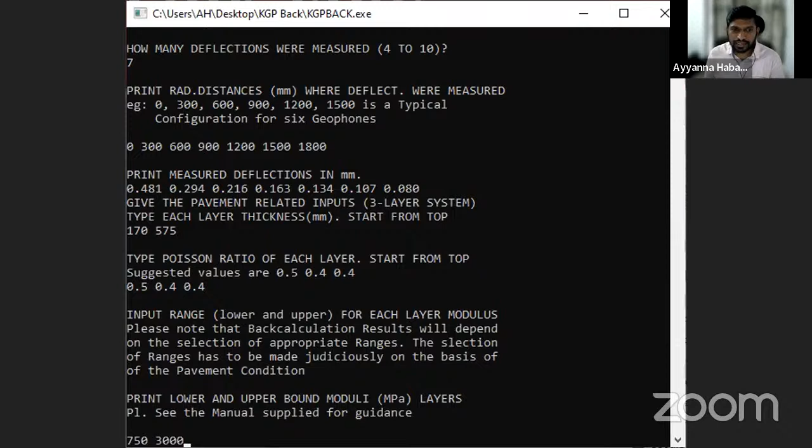Then comes the granular layer, combined 100 to 500. Then for the subgrade, there are various conditions: either we can use the equation, or we can take CBR based, 5 to 20 times the CBR. I'm taking in this case 50 to 80.

Then enter. Now you can find the results in the backout file in the same directory, use Notepad to see the result. KGP back is running, please wait, automatically this window will disappear, that is running in background. This is done, only this much is the input we have to give.

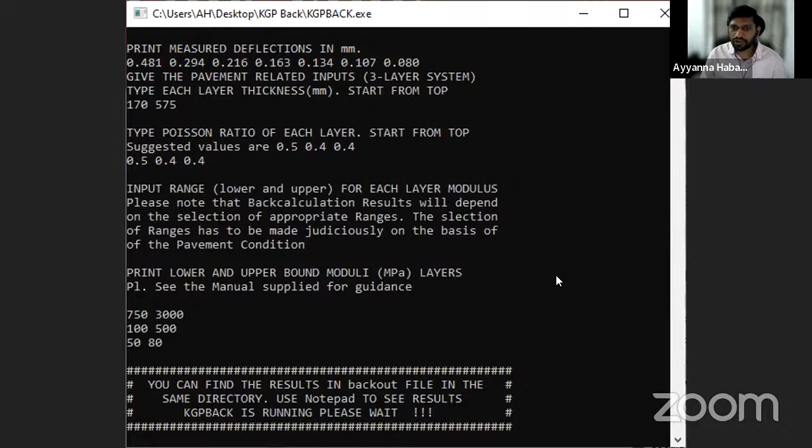We will get the output result in Notepad form. This process time varies from system to system. Because this window has closed, let me share once again, I will open the output file. See, when I open the output file, it looks like this.

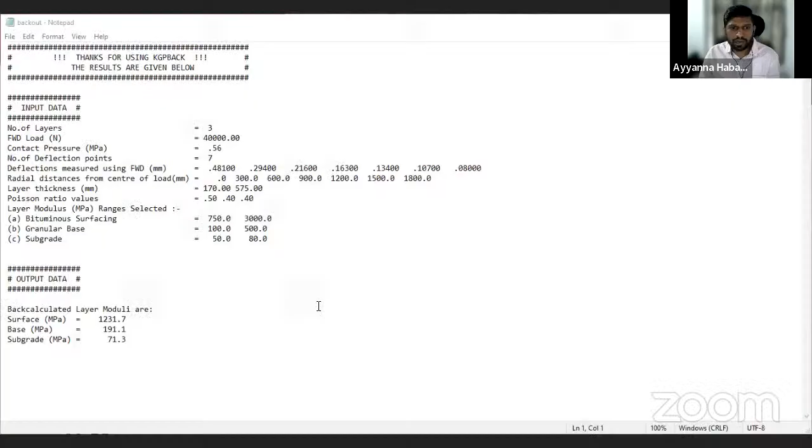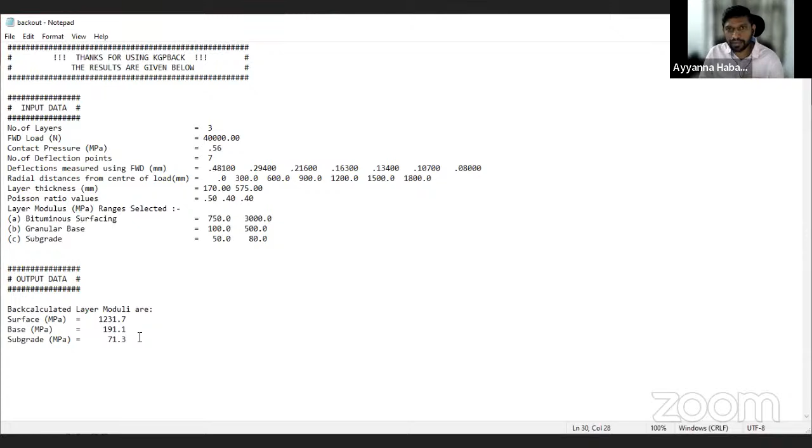Initially, input values will show whatever data we have given as input, check that. And at the end, we can see the output, the back-calculated layer modulus for surface layer, base course, and subgrade is given. You can see these values, this is called the back-calculated modulus. Further, this modulus has to be corrected for temperature for the surface course, and for seasonal correction for the base layer and subgrade layer.

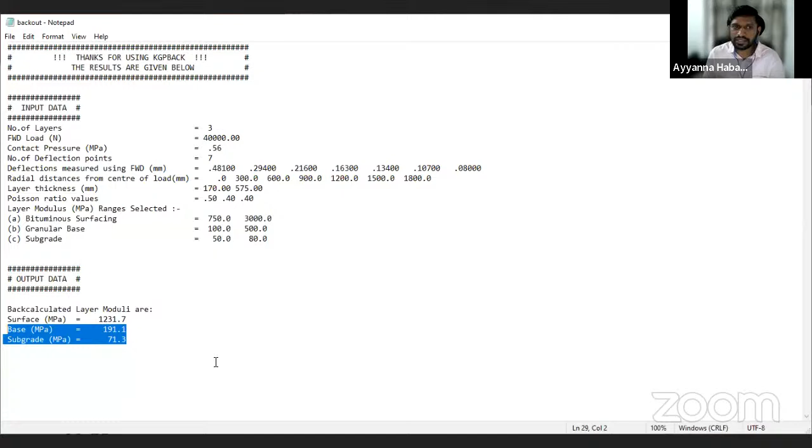After that, we have to take the percentile, that is the 15th percentile value, in IIT Pave. I hope this is clear. If you have any doubt, let me know.

Good afternoon to all of you. Actually, it is indeed a privilege and a pleasure for me to be part of this valedictory function. Though I wanted to listen to every talk by the experts, because of the multiple duties and responsibilities I'm entrusted with in the institute, I was not able to. But certainly, I have copies of their video versions. Late in the nights, I have been listening to them. I've been so much impressed with the content and the quality of the talks and speeches made by the illustrious speakers.

As Professor Das has concluded, the FDP sessions started from 7th February to 11th, and how these 5 days have gone is very difficult to imagine. I was keeping track, and I saw almost 70 to 80 to 90 participants on the video, online mode, and it's very nice to see such a good presence. The interactions with the questions and answers are also very absorbing, and definitely give an impression that it was a very beautifully conducted program by the Department of Civil Engineering at MSRIT, Bangalore.

Just to enumerate the things, as Mr. Das told, there have been 11 external speakers. When I go through their profiles, there are illustrious speakers with a tremendous track record of academic excellence, plus close association with industry work and extensive research in various materials and aspects of highway engineering.